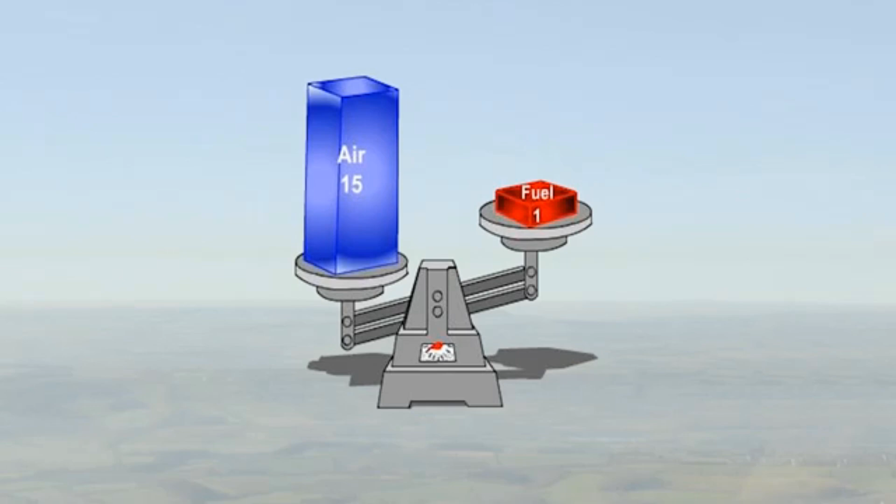At this ratio, all of the oxygen in the air combines with all of the hydrogen and carbon in the fuel. The chemically correct mixture does not, however, give the best results, because the temperature of combustion is so high that power can be lost through detonation.

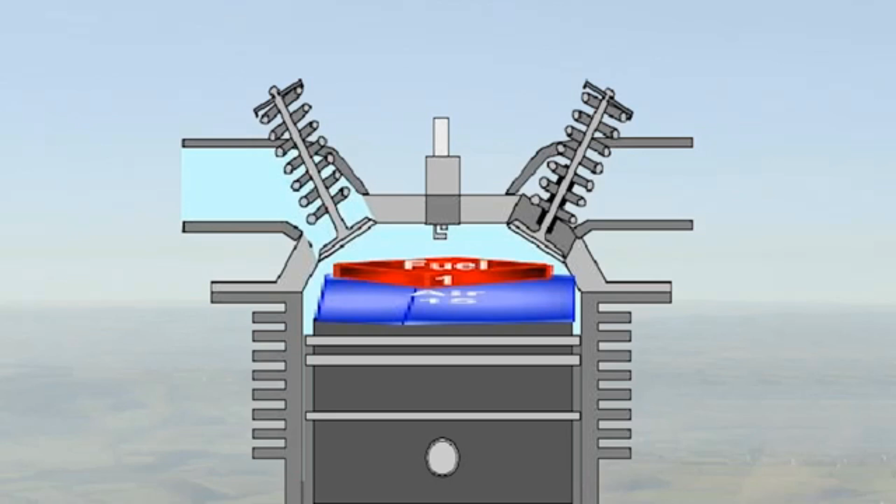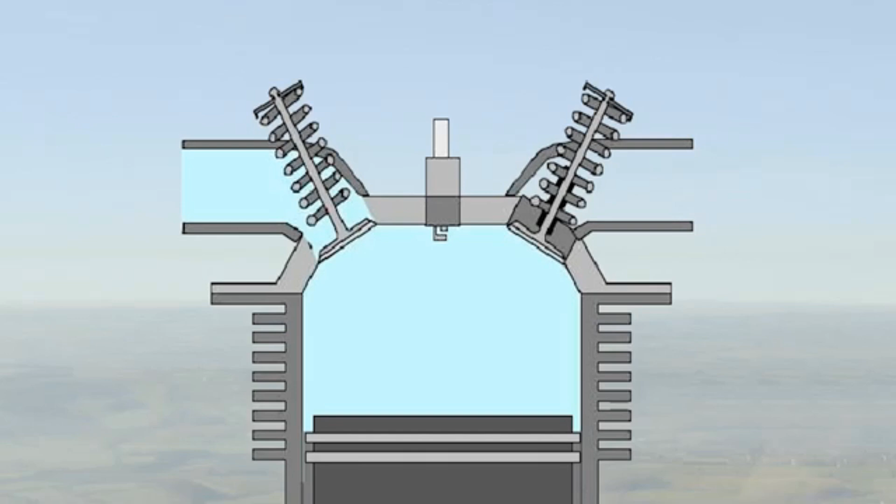Detonation is a phenomenon usually associated with weak mixtures and high cylinder head temperatures. It's unstable combustion, or more simply, an explosion, which occurs after the normal ignition point. In normal conditions, the flame travels smoothly through the mixture as the advancing flame front heats the gases immediately ahead of it, so that they, in turn, burn.

Progressively, more and more heat is concentrated in the flame front, which is brought to bear on the remaining unburnt portion of the mixture, termed the end gas, and its temperature is raised. In addition to this, the end gas is subjected to increasing pressure, partly from the fact that the piston is reducing the remaining space available, and partly because the burnt gases themselves are expanding.

Ultimately, there can be sufficient pressure and heat available to bring all the end gas to the point of combustion at the same instant, and it will explode. The flame rate increases from its normal 60 to 80 feet per second to 1,000 feet per second, with a degree of violence that depends on the amount of end gas that remains.

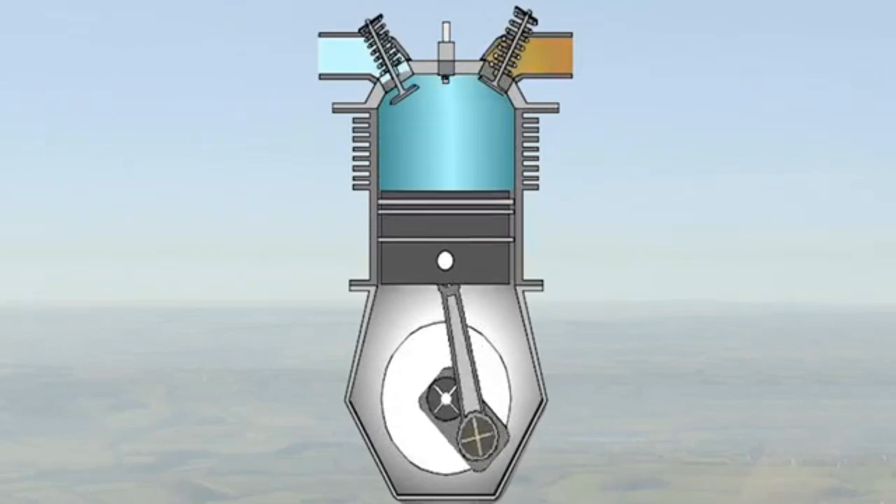Because of the ringing nature of the noise produced by the explosion, it's sometimes called pinking, and it can be extremely harmful to the engine, particularly the piston crown, which may eventually burn away with the inevitable consequences.

Reducing the temperature of the mixture, for instance by deselecting carburetor heat, or reducing cylinder head temperature by selecting a rich mixture, will both assist in preventing detonation. With a supercharged or turbocharged engine, reducing the boost pressure and increasing propeller RPM will also assist in preventing detonation.

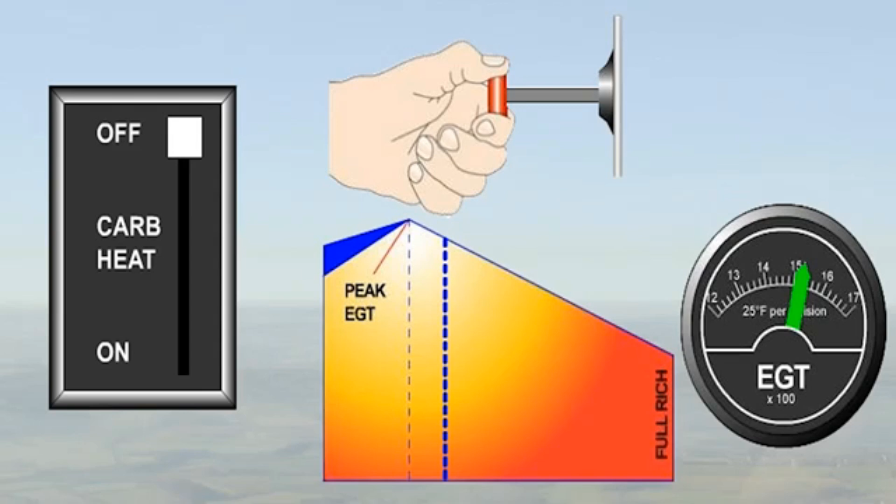Pre-ignition is often confused with detonation, but it is vastly different. Whereas detonation occurs after the normal ignition point, pre-ignition, as inferred by its very name, occurs before the spark occurs at the plug.

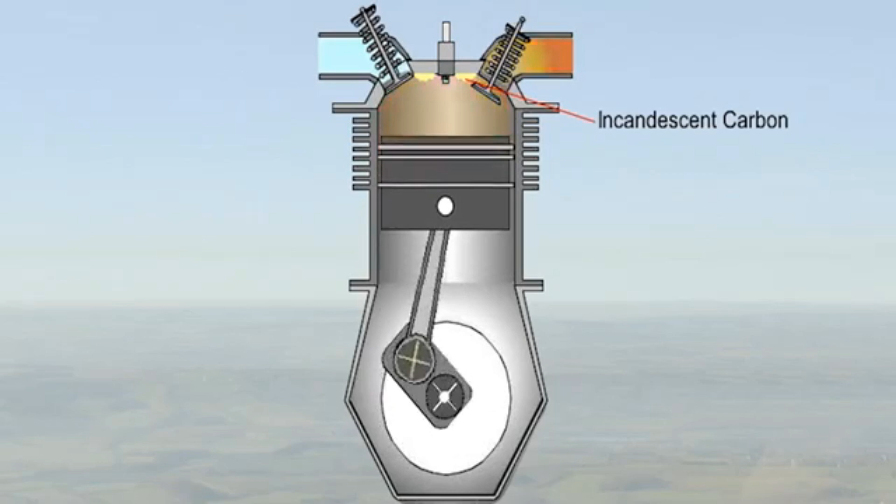This is usually caused by a local hotspot in the combustion chamber, either a piece of incandescent carbon or perhaps very hot spark plug points. Pre-ignition will cause rough running and an inevitable loss of power.

Although the chemically correct mixture strength would theoretically produce the highest temperature, and therefore power, in practice mixing and distribution are less than perfect, and this results in some parts of the mixture within the inlet manifold system being richer and others being weaker than the optimum strength. This variation may exist between one cylinder and another.

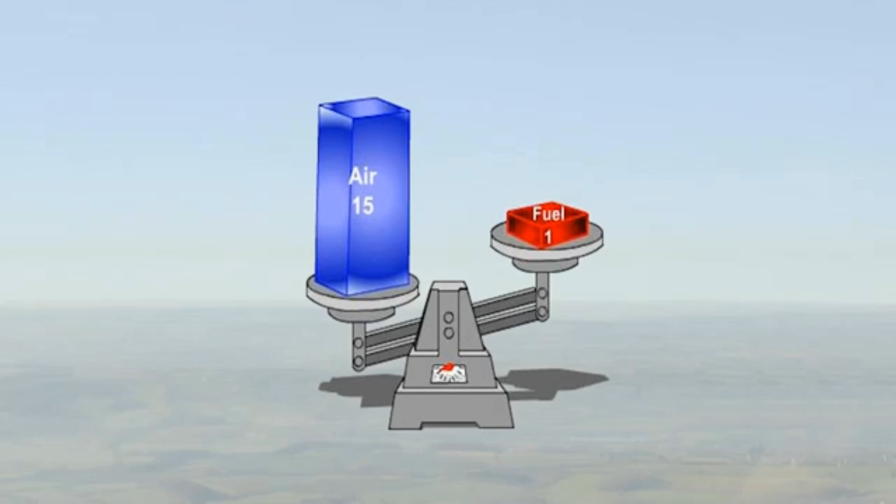A slightly rich mixture doesn't have much effect on power, since all the oxygen is still consumed, and the excess of fuel simply serves to slightly reduce the effective volumetric efficiency. In fact, its cooling effect can be, to some extent, beneficial.

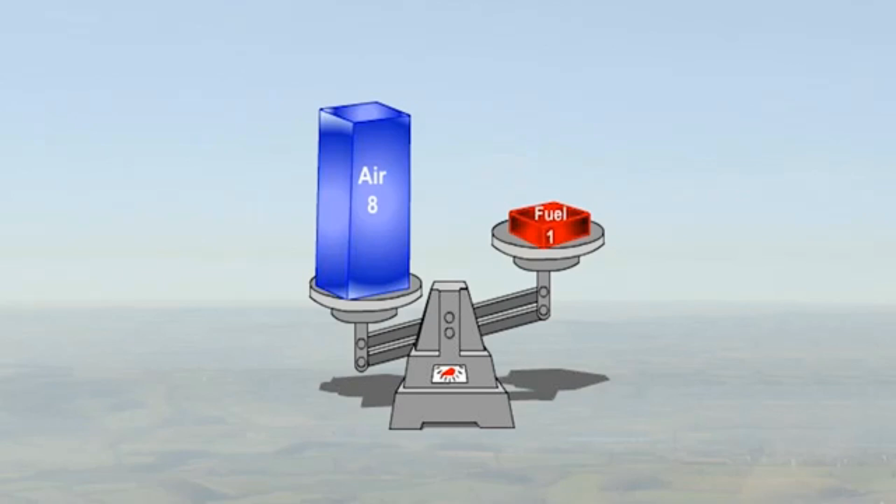Weak mixtures, however, rapidly reduce power, since some of the inspired oxygen is not being utilized, and this power reduction is much greater than that resulting from slight richness.

It is therefore quite common to run engines, when maximum power rather than best fuel economy is the objective, at somewhat richer than chemically correct mixtures, for example about 12.5:1, to ensure that no cylinder is left running at severely reduced power from its mixture being unduly weak.

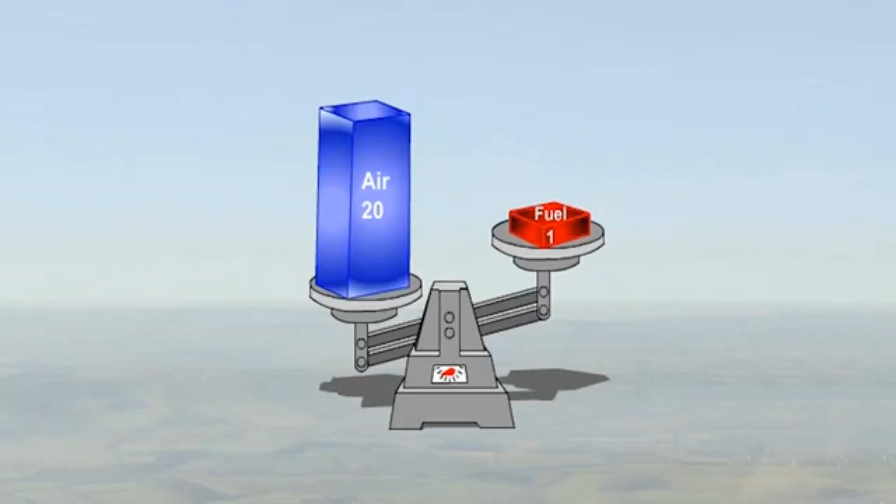However, mixture requirement is ultimately dependent upon engine speed and power output. This diagram shows typical air-fuel mixture curves.

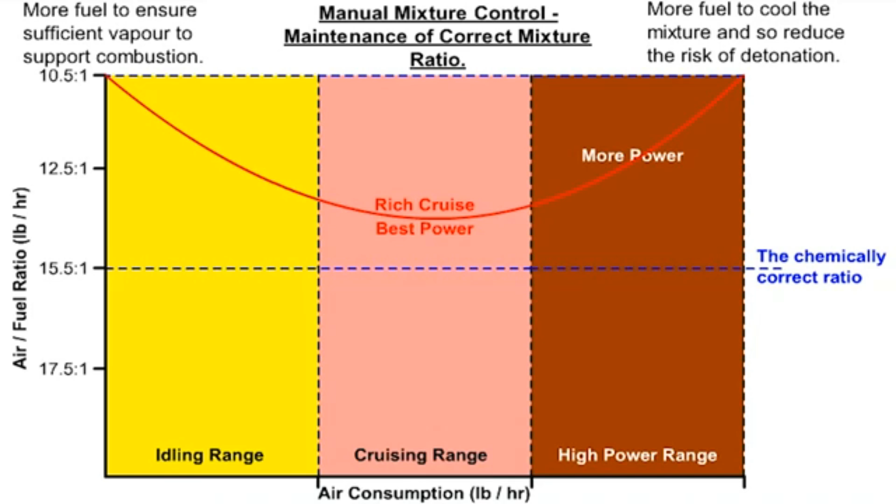Notice that a rich mixture is required for starting and slow running. This is because fuel will only burn when it has vaporized and is mixed with air. When starting, the engine is cold, and there is little heat to assist the vaporizing process. Therefore, only the lightest fractions of the fuel will vaporize. To make sure that there is sufficient fuel vapor in the cylinders to support combustion, a rich mixture is therefore required.

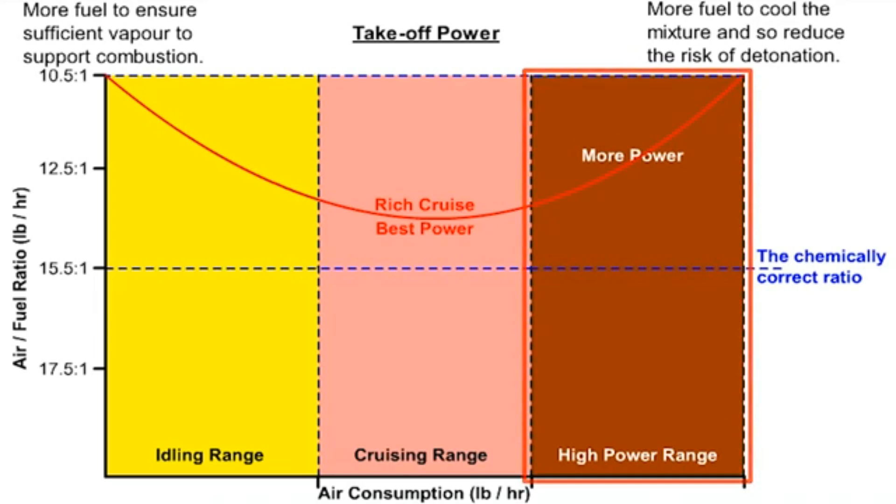When full power is selected for takeoff, the mixture must be enriched to about 10:1. Apart from the cooling effect, the excess fuel is wasted, for there is insufficient oxygen available for it to burn completely. The higher power results from a greater weight of charge induced in a given time, and not because of mixture enrichment. In practice, excess fuel vapor is not scavenged as vapor.

The oxygen is shared out to some extent, so that carbon monoxide is produced during combustion as well as carbon dioxide. With very rich mixtures, some of the carbon fails to combine with oxygen at all, and is exhausted as black smoke.

When higher power is required for climbing, the mixture is enriched to about 11:1. The extra fuel in vaporizing cools the mixture and reduces the tendency to detonate.

The cruise portion of the diagram shows that it is really the only time the pilot has any choice in what mixture is set. If time is no object, then during cruising flight only moderate power is required from the engine. Thus an economy cruise setting can be used.

Fuel consumption will decrease accordingly. On the other hand, if speed is of the essence, then performance cruise power can be selected. The fuel consumption will of course rise, in some cases by as much as 20%.

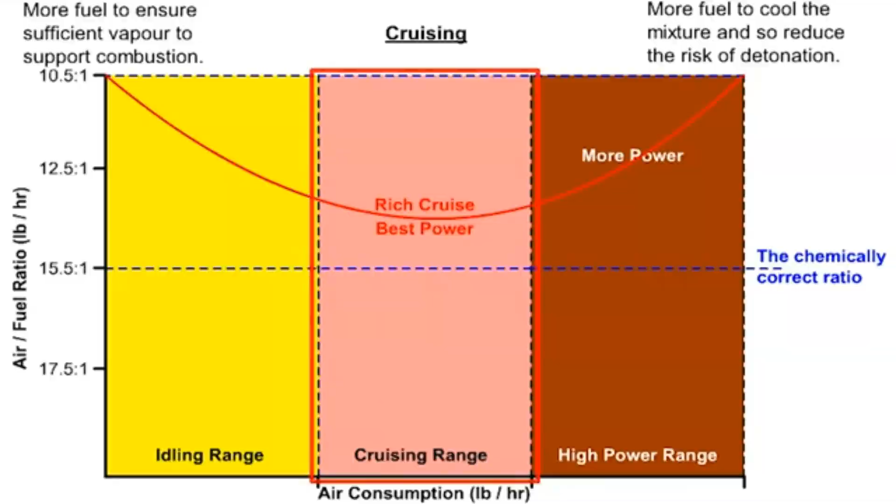Because the density of the air decreases with increase of altitude, as the aircraft altitude increases, the weight of air drawn into the cylinder decreases. For a given intake velocity, the pressure drop in the carburetor venturi will decrease as ambient density decreases. However, the fuel flow due to this pressure drop will not decrease by the same proportion, and so the mixture will become richer.

If we are not to use too much fuel when flying at altitude, then it becomes imperative that we have some method of defining and regulating the mixture strength. There are two approved methods of setting the desired mixture strength.

The first method presumes some knowledge of the effects that mixture change will have on the engine. Bear in mind that as the mixture control is moved from fully rich to a weaker setting, the air-fuel ratio approaches the chemically correct value of approximately 15:1. At this ratio, all of the air and fuel are consumed, and the heat released by combustion is at its maximum. More heat means more power.

With a fixed-pitch propeller, the RPM will rise, and airspeed will increase as more power is produced. If the mixture is weakened even more, the RPM will drop. Pushing the mixture control back to where the chemically correct mixture was found will bring the engine speed back up,

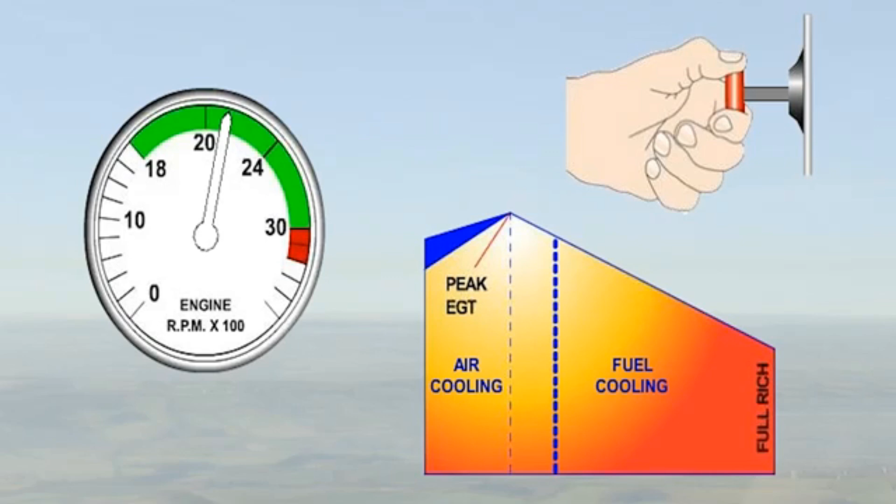The exhaust gas temperature gauge consists of a thermocouple fitted into the exhaust pipe of the hottest cylinder on the engine. The thermocouple produces a voltage directly proportional to its temperature. The voltage is indicated on a gauge calibrated to show exhaust gas temperature.

If the mixture control is moved towards lean, the temperature will peak at the ratio of 15:1. It should be remembered that this ratio should not be used, as detonation can occur.

Upon reaching the peak EGT, the mixture control should then be moved towards rich, and the exhaust gas temperature will drop. The aircraft's flight manual will specify a temperature drop which will give the rich cruise setting.